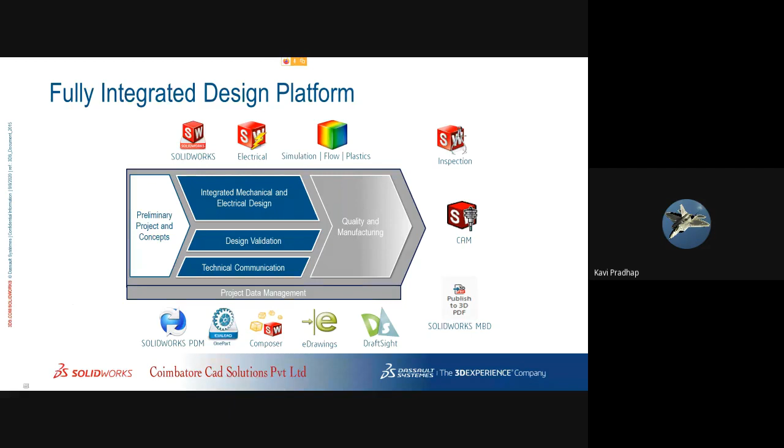So the different modeling techniques - as I said, 3D modeling is very basic and essential to print the 3D product. How do we create that? Mainly there are two ways: feature-based parametric modeling as well as reverse engineering. Feature-based parametric modeling is when we have a concept, we can create that concept into a product or a part. That is the normal way.

We will create a sketch, convert that sketch into a 3D part, add material where it is required, and remove material where needed. Likewise, we will be creating from the scratch one by one. So that is actually the feature-based parametric modeling technique.

Then we have reverse engineering. Most of you might have heard about it. When you have a picture, you can use vector pictures, like black and white pictures, to trace the outer profile and convert that into a 3D model. And we might also know about 3D scanning. We also have 3D scanners, just like 3D printers, which help us capture the three dimensions of the component.

We are not 2D anymore, we have 3D scanning. So when we have the 3D scanning, when we have the total cloud points, you can import the cloud points into SolidWorks and do some changes. So whenever we have some components, if you want to do modifications, you can again create it using feature-based modeling. That is one option.

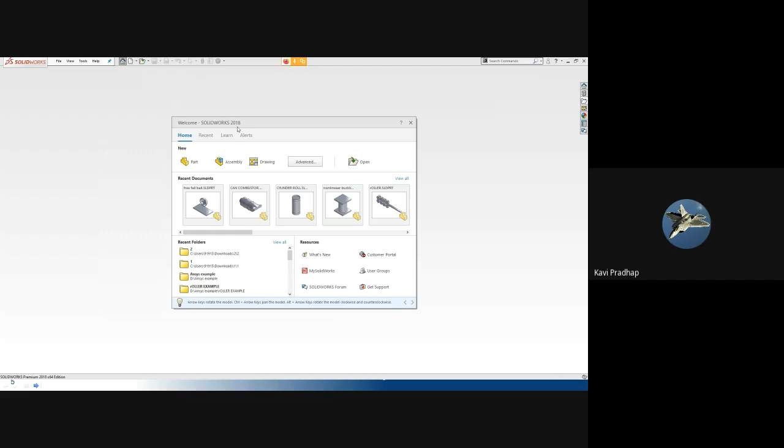Basically, when you open it, this is how it looks like, SolidWorks. This is the basic window. Most of us will get like this when you open SolidWorks, this is how your window will come.

As you can see here, we have three major modules: part design, assembly, and drawing. Part design is where you can create individual parts. When you have individual parts, we need to combine them as a product, and for that you go with assembly. Assembly is like when we want to create something, we purchase all the products and start assembling them. So when you have the individual part created virtually, you can assemble it using assembly, then convert it into a manufacturable drawing.

We all know that when you want to go for manufacturing, we need to provide orthographic and isometric views, and explain the component dimensions and what needs to be done in the drawing. For example, how much roughness it should have, what kind of plating is to happen, what operations need to be done after or before manufacturing, and what tolerances we need to provide. You can provide all these kinds of things in the drawing.

So basically we have three: one is part, the other is assembly where you can assemble it, and the third is drawing, where you can convert that into a manufacturable drawing.

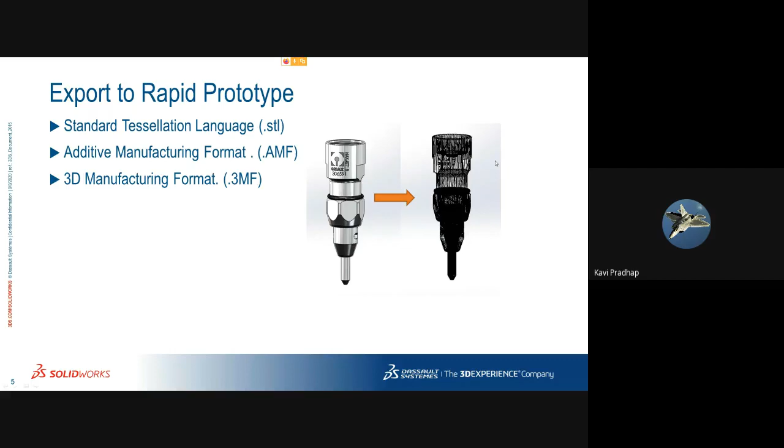Let me adjust some screen resolutions also.

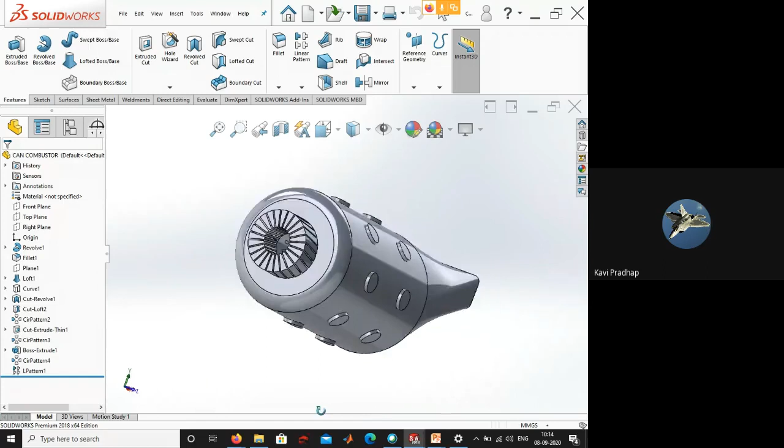So here, basically this is the graphical area where you see the plane area. This is a graphical area where you will create all the 3D models. Okay, let me show you an example. When you have a component, a combustion chamber, whatever it is, the 3D model, the creation and the rotation, everything can be seen in this graphical area.

And this particular toolbar is the heads up toolbar, where you can use the most frequently used options: front view, top view, side view, section views. You can provide front view, top view, side views, etc. It's called heads up toolbar. You can provide colors, you can change screens, those things. Then we have command manager.

All the things that you can do with SolidWorks will be categorized as features, sketches, surface, sheet metal, those kind of individual tabs. The entire thing is called command manager. Each tab in the command manager has a set of features, like sheet metal design, mold tool design, surface design. Those kind of things can be done here.

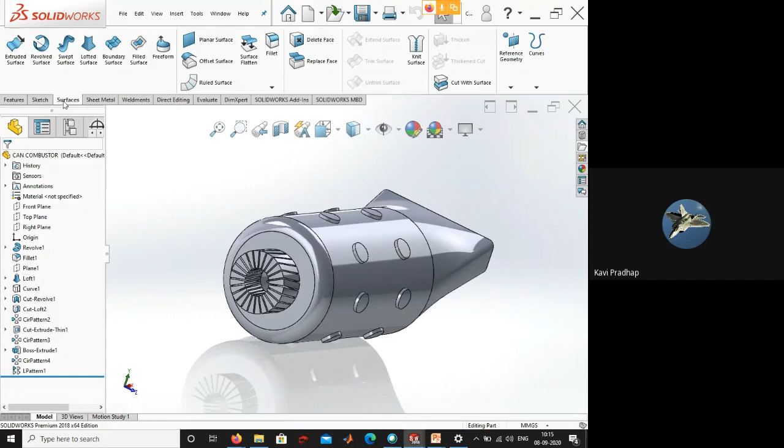So let me show you how you can create these kind of components from a basic sketch. Whenever we want to create a 3D, it has to be started from 2D sketch. When you want to create a rectangular block, we have to start from a rectangular sketch. First, you have to draw the sketch and convert that into a 3D. So we have two environments for that. One is the sketcher environment. In the command manager, you'll be having sketch.

Hope most of you also have a software to work with. If you can't find anything, let me know.

So in the command manager, you can see sketch. Now you will be able to access all the things required to create a sketch. When you want to create a 2D sketch, we need some references. In engineering graphics also, we have a drawing board, and on top of that we place the paper. Without a reference, without a stationary plane, we cannot create any sketches. So just like that, we need planes. These 3 planes represent 3 directions of the component.

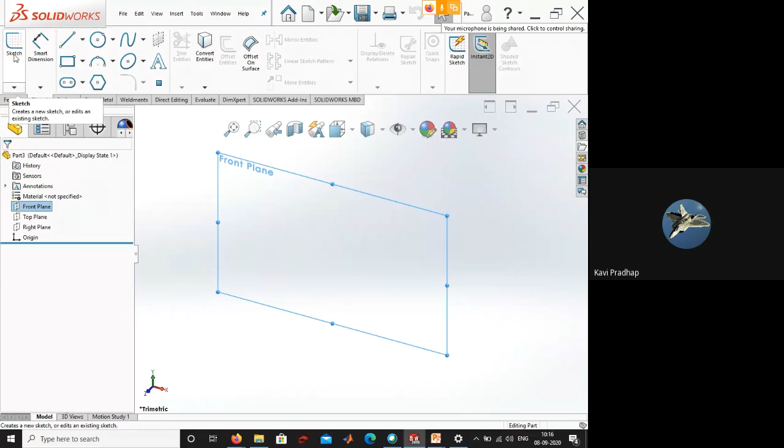Whatever we have in real world, everything is 3D. So these 3 planes represent 3 directions as well as 3 planes. Select the front plane, go for the first option, sketch. When you do that, you'll be entering into 2D environment. What we are having is a part in the 3D environment. If you want to create the part, you have to start from 2D. To enter into 2D, first select the plane, then go to the option sketch.

It is common for all the softwares. Some of you have worked with Creo or CATIA, some with SolidWorks, and some have not seen CAD software. In future, with any other software, the methods and techniques will be the same, but the names of the individual options will vary, nothing else. So select the plane, go to the first option, sketch, and you will enter the 2D environment.

Here you can access all these tools: lines, points, circles. When you want to create a cylinder, just draw the circle. The circle dimensions can be anything. You can enter the value here. Sorry. You can enter the value here. Diameter is 100. Just enter that. You can provide dimension. Providing dimension is very important when you create something.

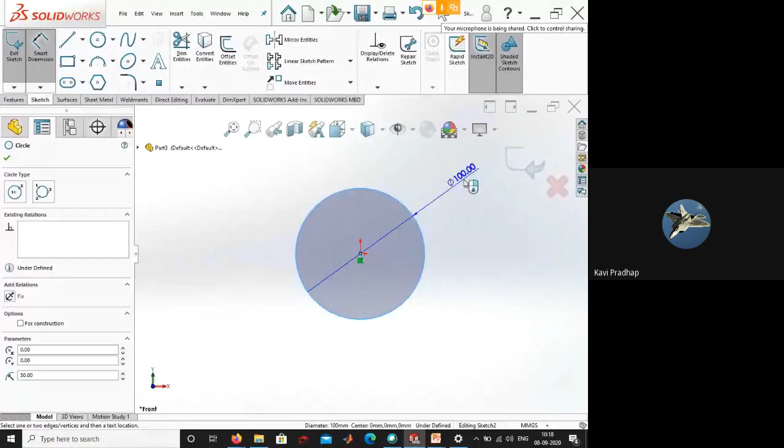Only if you provide the dimension will it stay at 100 mm. Otherwise, it will not be 100. So providing dimension is very important. Even after I create it as 100, if I try to move it, the dimension can be varied just by dragging. That's why we need to provide dimensions. Here you can see smart dimension. Using this single option, you can provide all the dimensions: linear dimension, distance between 2 points, line, radius, diameter, angle.

So select, you can provide 100, the component will be 100. Okay, so from this what we can understand is that it is called parametric. Parametric in the sense you can drive the geometry using dimensions. When you change the dimension of that particular geometry, the dimension of that component will also be changed.

So for example, it is 100 mm. If I try to change it to 200 mm, the size will be doubled. As you can see, the size is doubled to 200. So likewise, when you change the dimension, the sketch shape of the component also gets changed. That's what parametric is.

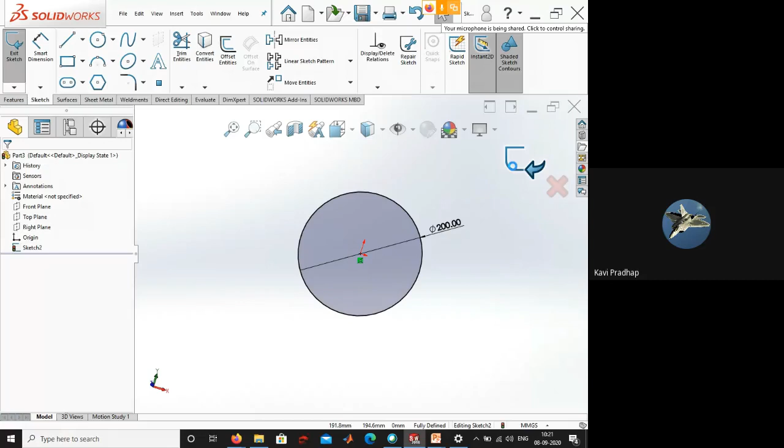So once you've created the sketch, it can be anything. In this case, I have a circle. I'm going to convert this into a cylinder. Once you have created the sketch, you have to come out of the sketch. Just click this and you will be out of the sketch. You can convert this into 3D using these feature options.

So the first things: extrude boss, revolve boss, sweep, loft, boundary boss/base. These options are used to create material. The other options, the cut options, extrude cut, hole wizard, revolve cut, sweep cut, are used to remove material. That is the difference between these two, like positive and negative. So you can create material and you can remove material.

So first let me create the material. If I want to convert this into a cylinder, select the sketch, go for extrude. You can see the length that it is creating. So you can vary the length of the component to whatever dimension you want. So first you create the sketch, and based on that you can vary the length.

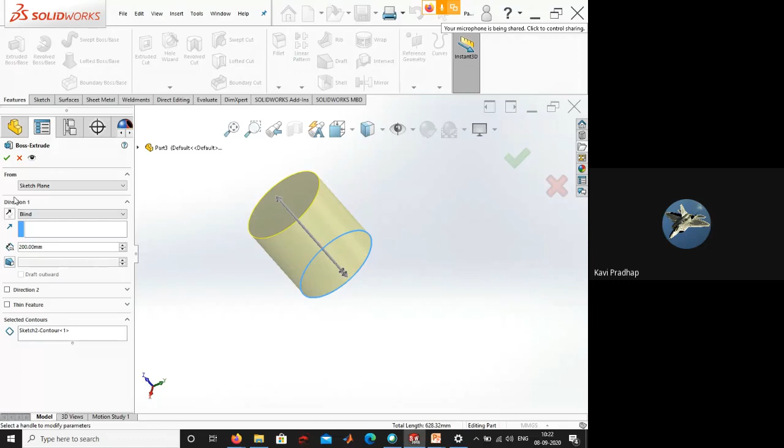So the diameter is 200. The length I need is 200. So it is going to be a cylinder with the diameter and the length as 200. Once you've given the length as well as the dimension, just click OK. So this will be converted into a cylinder. When you want to create something, it can be any component. This is just a cylinder.

So most of you might be thinking it is very basic. Yeah, I will explain one more component also, which will have other features. For those who don't know CAD modeling, this is for them. You can create the 2D sketch and convert it into 3D. Here you can see all 3 views of the component. You can create anything you want, but this is the basic way: first create the sketch, then convert it into a 3D model.

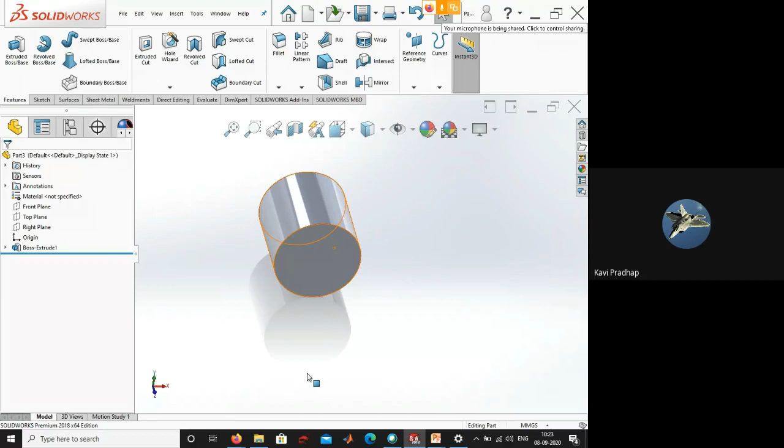There are different ways of converting it into a 3D model. Extrude is one of them. Revolve, we have sweep, loft. Let me give you an example. So if you want to remove something, I want to remove material inside of this. So select the point, provide the value, provide some dimensions to this.

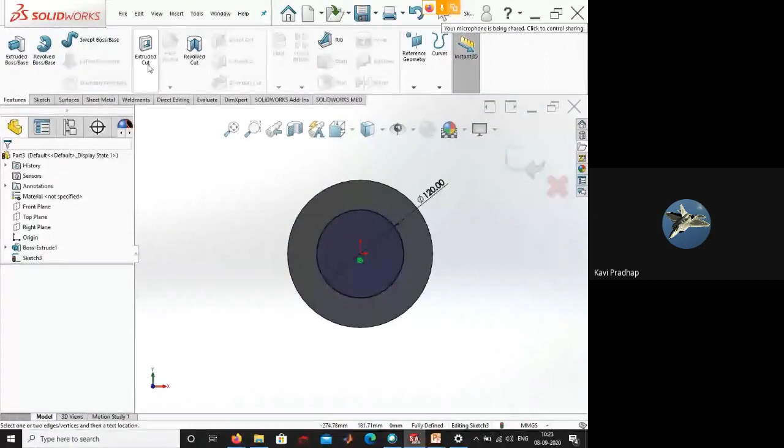So go for extrude cut. Extrude cut is to remove the material. As I said, extrude boss is to add material, extrude cut is to remove material. So you can perform this operation. Just like that, you can remove the material. So you can add material as well as remove material. When you want to create some component, it can be anything. So let me show you one example.

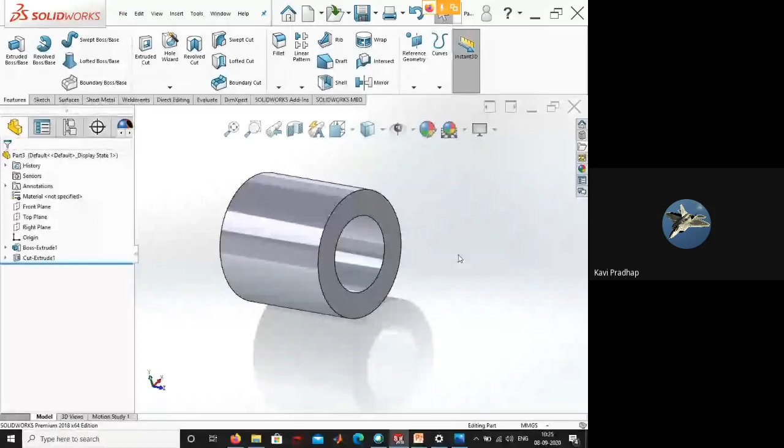So likewise, you have to split them one by one. Once you have split it, you can create it as a model. First, when you see a model, we have to split them as identical components: rectangle, circle, square. Then we can create that using SolidWorks in the same options.

So do not think that it is just a rectangle or a cylinder, because whatever component you are seeing in the real world, everything is made up of basic shapes. So when you know how to create a basic shape, if you combine them together, you can make any kind of shape. So whatever you're seeing here, I'm going to explain using basic shapes only. So let me show you how you can do this.

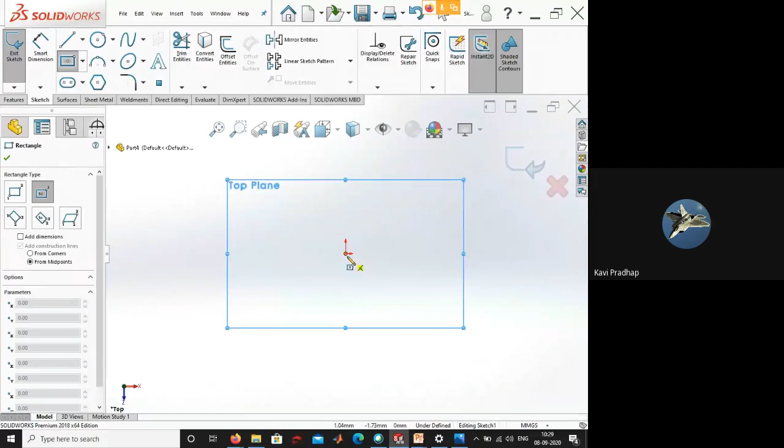See all these shapes: parallelogram, square, rhombus, rectangles. All these are 4-sided polygons, and they can have a different nature. For this, we can take a center point rectangle. A square is also a type of rectangle; the difference is it has the same dimensions. So width and height are both going to be 80.

So how did I give these dimensions? Let me show you once again. When you draw this shape, go for the smart dimension, select this line, provide 80, and select this line, provide 80. If you provide both of them, you can see the color variation in the component. Hope it is visible to everyone. The color will be varied.

Previously it was in blue color, now it is in black color. That is actually a nature of SolidWorks: if a sketch is not constrained, the dimension of the sketch is not fully given, then it will be in blue color. If all the dimensions required for that particular sketch are given, then it will be in black color. That is the basic difference.

Hope you understood this. Once you have given the dimension, you will not be able to change the shape by just dragging. But if it is in blue color, let me draw another thing. So here, if it is in blue color,

Govind sir, you please stop presenting, sir. Govind sir, you please stop presenting. Govind sir, yeah. Hope it is visible to everyone. Yes, sir. It's visible again. Yeah. Thank you, sir. Thank you for your response.

So here you can see blue color lines that can be changed. If I try to drag the same black color point, it cannot be changed. So that is why we are providing dimensions. When we define this line as 80, the line will be 80. It cannot be changed by just dragging. If you don't define it, it can be anything. So that's why defining a sketch is very, very important.

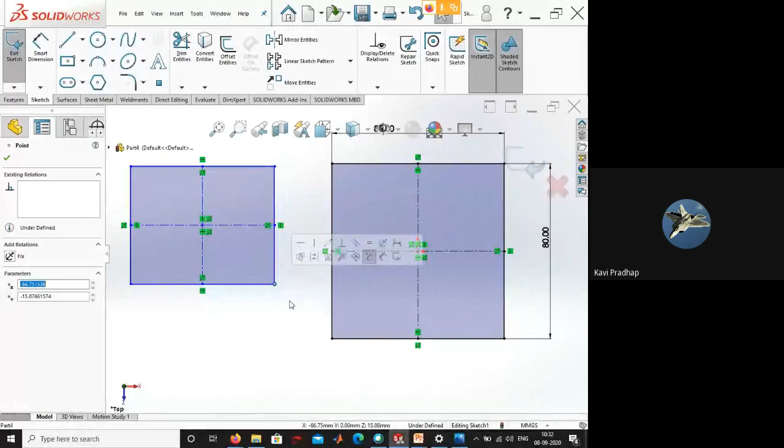Just explaining once again, since it is very important. If it is a blue color line, you can just drag. If it is a black color line, you will not be able to drag it. I'm trying to drag it, but it is not dragging. That's because I have defined the dimension of that sketch. The shape is 80 on the top, 80 on the side.

So now you can create this extrude. You can go for the extrude and provide 12 mm. So this is the top view, as you can see. If I zoom out, you can see the front view. In the front view at the bottom, there is a rectangular shape. That's our rectangle. The height of that rectangle is 12 mm. Wherever my mouse is roaming, you can see it is 12.

Hope this is clear to everyone. I'm just zooming in a little bit to show you the 12 mm. That's why I'm giving the dimension as 12 mm in boss extrude. I have created a 2D sketch and we created a rectangular shape. So the height of this component is going to be 12.

Now it is time to provide filleted edges. When we have sharp edges, it could create some problems. For example, manufacturing a sharp edge will be a little bit difficult compared to curved edges, whether we manufacture it using a conventional lathe or milling machine, or even CNC. After creating less radius edges, we have to file it. So that is one.

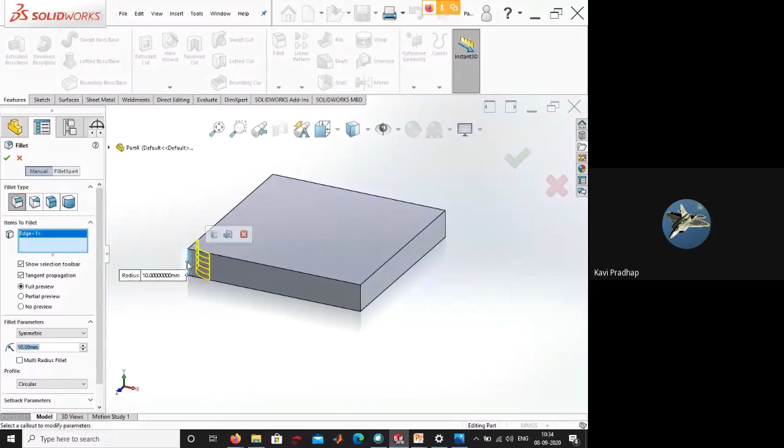So let me select this edge. SolidWorks has an intelligent selection to select all 4 edges automatically. As you can see here, I can go for the fillet option. Select the edge where you want to provide the fillet. Similar kinds of edges can be selected using this intelligent selection. Now the radius is 10 mm, just give okay.

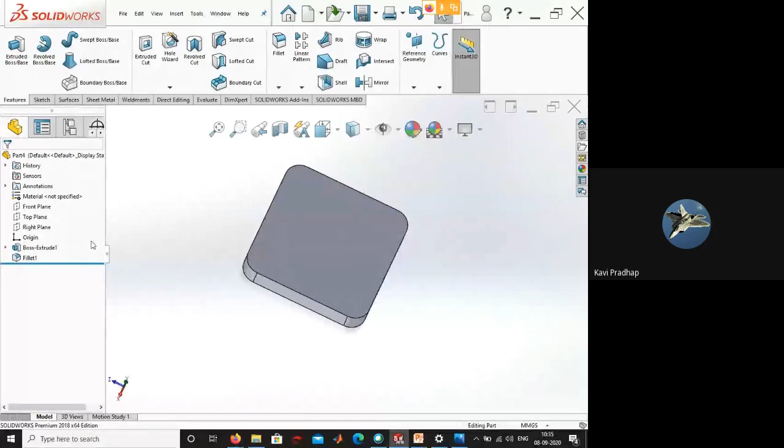So whatever we have seen from the top view, it is very similar to this. Now let me go back to that. Here you can see it is similar to that, except we are having a lot of shapes, holes are there. First we need to create that. So in the top of this rectangular plate, we have to draw a cylindrical shape. The diameter of the cylinder is 50. Here you can see this is the cylinder.

The diameter of the cylinder is 50. I have zoomed in a little bit, so you might be seeing it right now. So this is actually 50.

Kavi Pradhap sir. Yes, sir. Kavi Pradhap sir, sorry for disturbing, sir. Is the screen sharing enabled only now, sir, in your lab? Yes, sir. It is enabled, sir. Okay, sir. We got a command. Okay. Thank you, sir. Carry on. Oh, yeah.

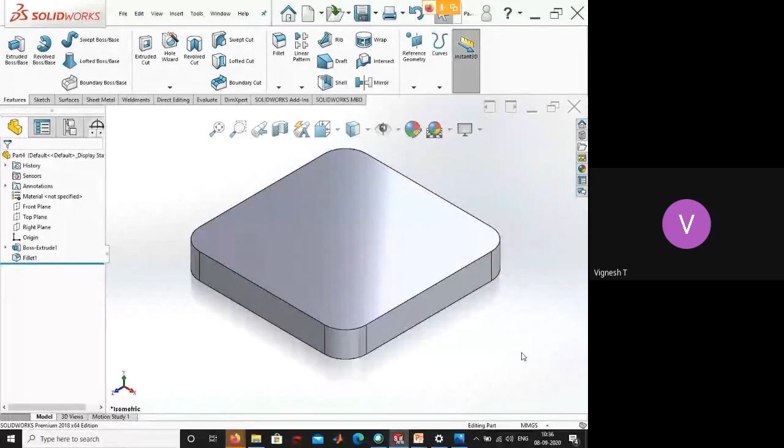So I can select this face, go for the sketch, new sketch. So here you can see whatever sketch we want to draw, either it can be on a plane or it can be on a planar face. But you will not be able to select this particular face because it is a cylindrical surface. We will not be able to select this face as a reference. So if it is a reference face, it has to be planar or a plane.

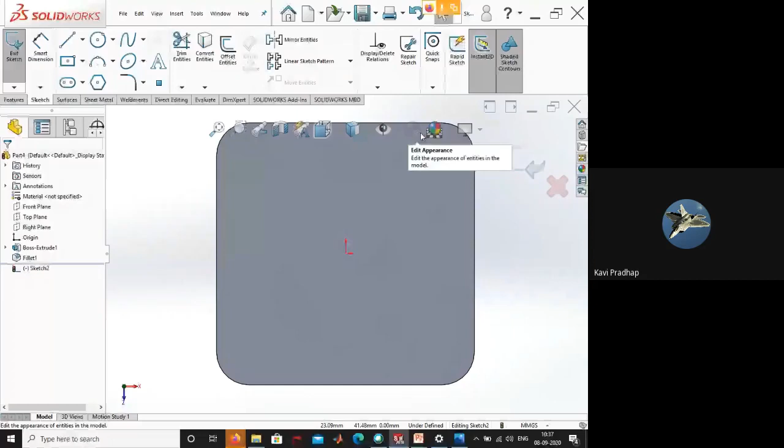So let me go back to its original position, Control 8. There are a lot of shortcuts. I will explain them once I have created the model. From front view, back view, right view, top view, side views, for everything there is a shortcut. I'll explain it. So now let me draw a circle for the cylindrical area, 50.

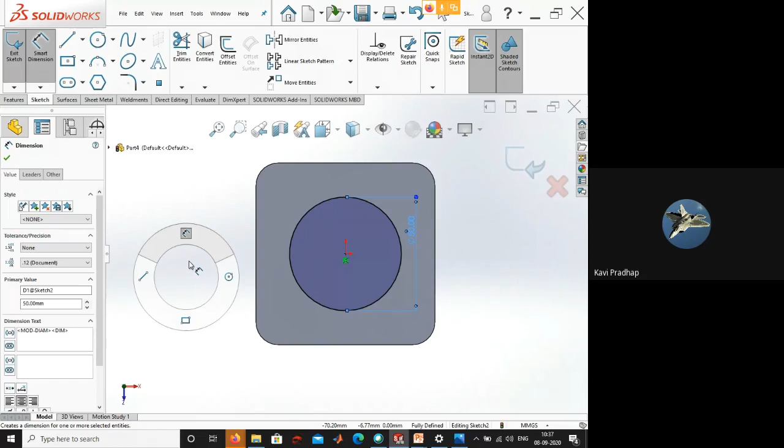So when you right click and move, you'll be able to see this mouse gesture. This is where I'm getting this smart dimension. Without selecting here, if you right click and move, the smart dimension option will be enabled. This is actually one of the shortcuts. It is the quickest way to access smart dimension.

So once you have created the sketch, go for extrude for the length. So here we need to find the total length. The total height is 62. From the top, it will be 50, since the height of the rectangular area is 12. From 62 to 12, you can see the difference is 50. So this will be 50. So just give OK. So now it is extruded.

Now you can remove the material. We have created the material. As you can see from the front view sectional view, there is a hole with a diameter of 26. Here you can see. Let me zoom in a little bit.

Sir, I think a little bit of noise is there. So kindly mute yourself. Thank you, sir. Thank you for your response.

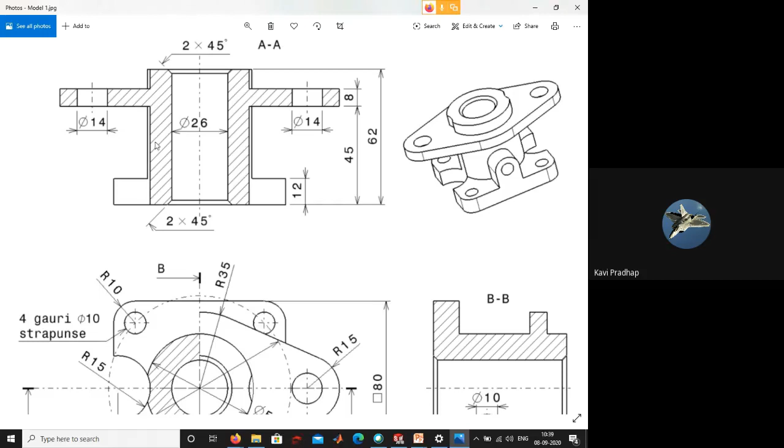So here you can see there is a section view in the front view. Let me zoom in even a bit. Hope you can see this. So here there is a hole at the center. If I see from the top view also, there is a hole. The diameter of that particular hole is 26. So that we are going to create.

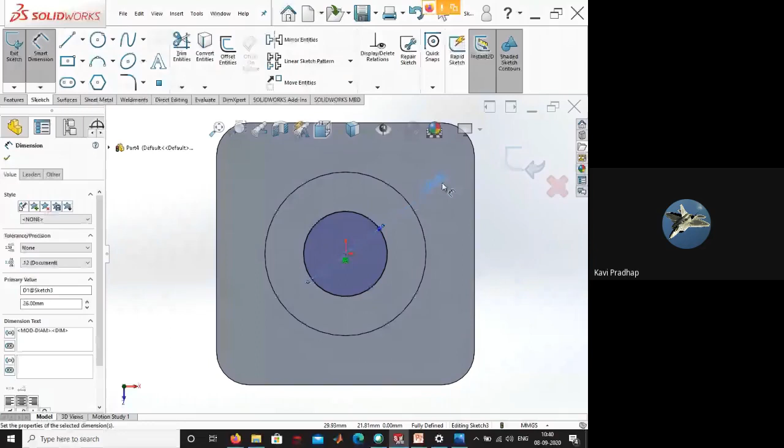Select the top face, go for the sketch option once again. So now we will be able to create the sketch. So select this circle, create it, and provide the dimension for this as 26. So likewise, when you want to create a model, it's like a building block. Wherever material is required, we need to add the material. Where removal of material is needed, you can remove it using the cut options.

Once you have created the circle, come out of it, select the sketch, go for extrude cut. So through all. Throughout the distance, everything has to be removed. So let me provide through all, or you can just drag the arrow. You can click and drag the arrow to control the length. Hope this is visible to everyone. So here you can see, you can just click and drag the arrow to increase the length. The material is removed.

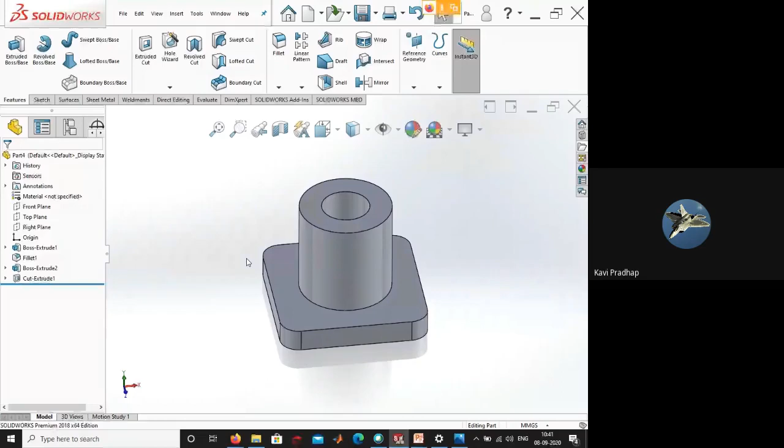So likewise, one by one, we have to create each one of these features, and everything is listed in the feature manager. Let me show you by zooming in. Hope now it is clear to everyone. Here you can see this is the boss extrude and fillet that we have created. Again, an extrude of the cylinder. Then we have removed material. So likewise, whatever feature you do, everything will be listed here. So you can easily identify how you or somebody else has created the model.

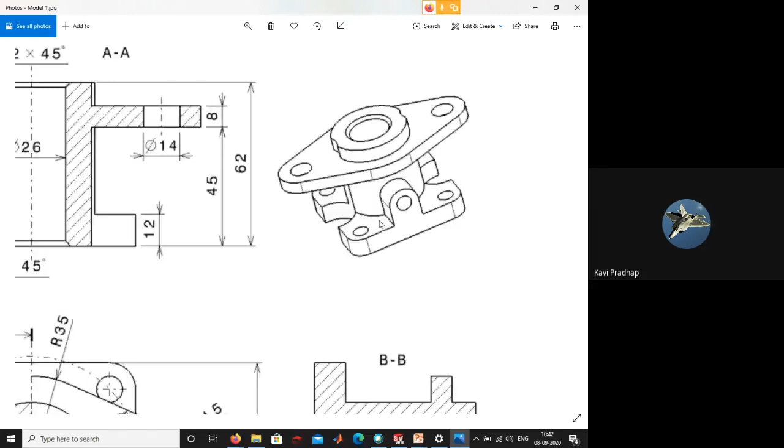So now the other thing, from the sketch, you can see there is a cutout on both sides of the cylinder. So here you can see there is a cutout on both sides. So there is a circular cut. If you see from the top view, you can see the dimension.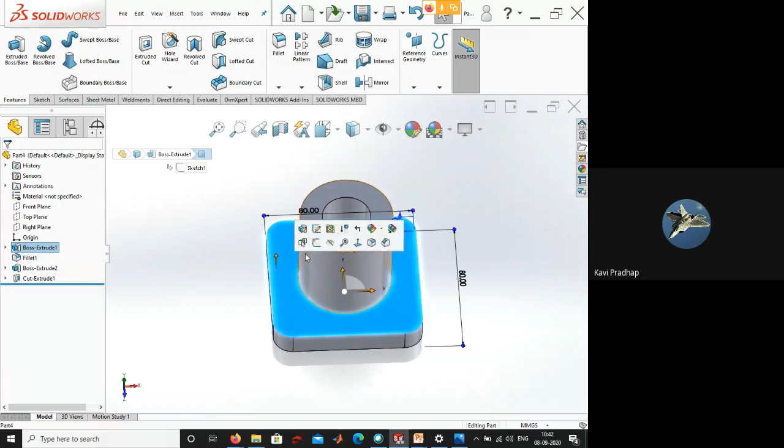You can see from the top view the dimension. The radius is 15 on both sides. So let me select the top face, get into the sketch, and create the dimension for that component sketch. If the radius is 15, you can provide the diameter as 30.

So extrude cut, we are going to remove the material. Extrude cut, just give okay. So when you want to add material, use extrude boss. When you want to remove material, use extrude cut.

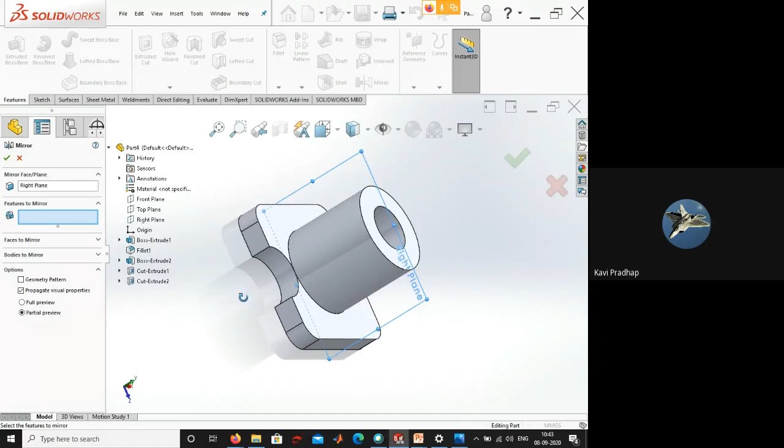Select the plane, the center plane. About the center plane, you can select this cylindrical, and you can see it will be created on the opposite direction.

So if you want to make changes after creating it, you might be wondering, even after creating, can it be editable? Yeah, it is editable. So even after creating this, you will be able to edit it. Let me show you how you can do this.

So here you can see it can be changed to the dimension wherever you want. Let me go back to the dimension. Here you can see it is from the center, it is 38. So if it is 38 from the center, you can provide the dimension as 38.

When you do that, there will be some intersection over the cylinder. You can see the same thing here - there is a cutout here. That is why the cutout is there. So let me come out.

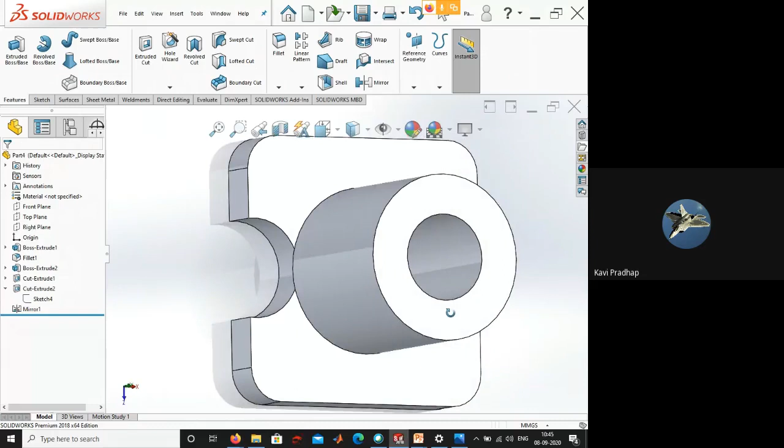So you can modify it in both directions. In both directions, the material will be removed. Hope this is clear. So likewise, even after creating the component, if you want to edit something, it will be easy - you can just go back to the sketch and change the dimension, then come out of it. It will be updated. Yes, I will explain this step once again.

There is a question asking me to explain this. Previously, I didn't define this dimension - I just created it. So now, after defining this dimension, when I come out, you can see it is removing material in only one direction, not the other. In order to remove material in that direction, go for extrude cut.

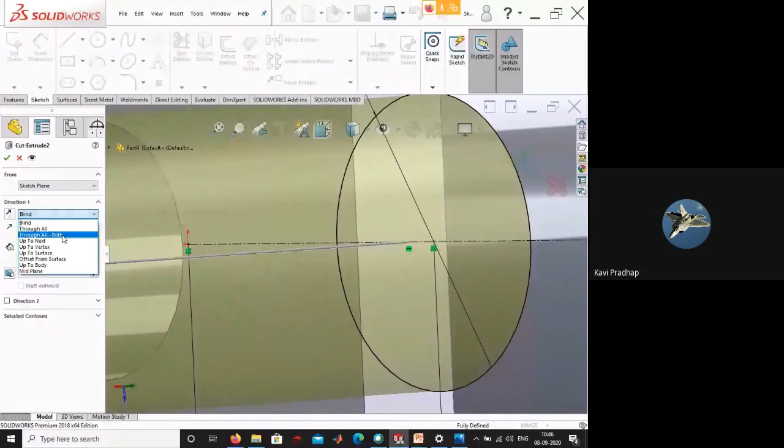Extrude through all on both sides - in both sides, you have to remove the material. You just have to change the option to through all both sides, which means all the material on both sides within the sketch will be removed. So if you do it in this direction, that will happen on the other direction too, since it is mirrored.

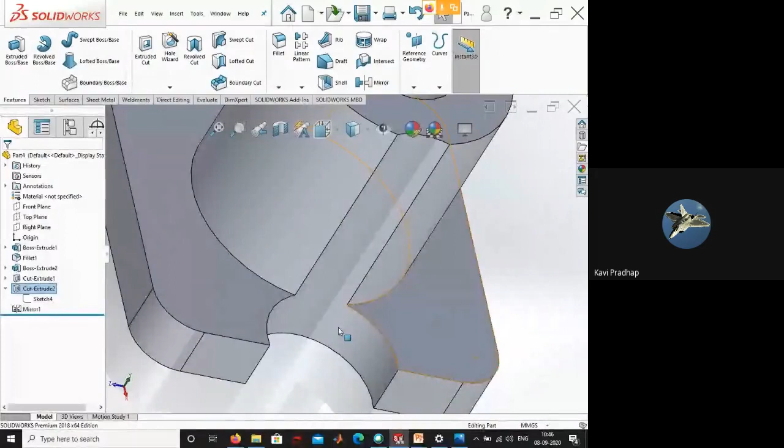So it is very connected. Whatever you do, everything will be associative - other things will also get changed. Hope this is clear.

So now the other things - there are a lot of holes, and there is a diamond shape component needs to be created on the top. Also, you can see at the center hole there is a chamfer, 2 into 45 degrees - it is actually a dimension of chamfer. As I said before, if you want to convert a sharp edge, you can convert it into fillet as well as chamfer. So the dimension 2 cross 45 is actually for chamfer.

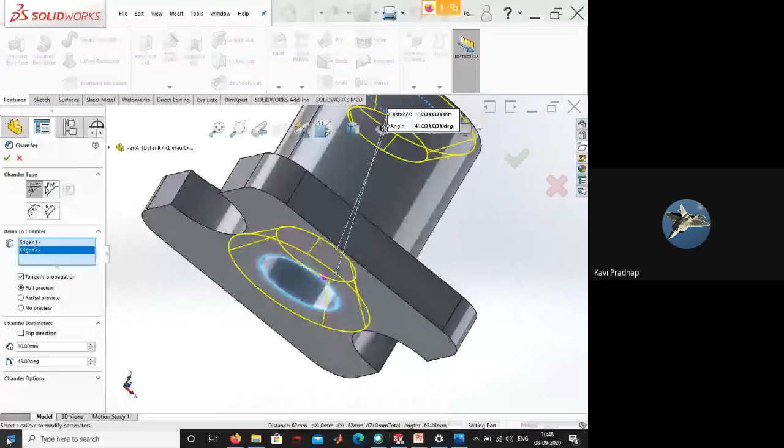So if you want to perform this chamfer, just below the fillet you have an option called chamfer - a drop down. Select it, go for the chamfer, select this edge, select the bottom edge, and you can provide the dimension on the left hand side, along with the angle. Let me zoom in a bit so it should be visible now.

So you will be able to change this 10 mm into 2 mm, and 2 cross 45, as it was defined in the dimension. Okay, so just go upward.

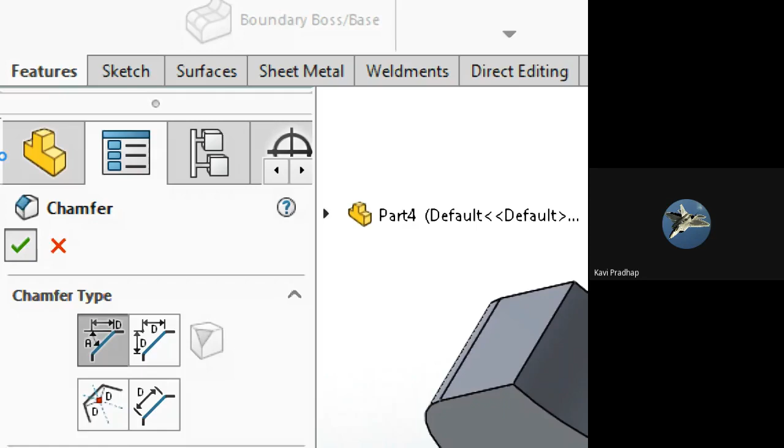You can provide this green tick. Whenever you do an operation in SolidWorks, you have to press this green tick. When you press the green tick, it will take it as okay and complete the operation. Let me zoom out to show - now you can see the edges are chamfered.

Okay, there is a section view here. This option is called section view. So if I select this option, the component will be sectioned. Component will be split into two half. You can see how the component will be in the inner side.

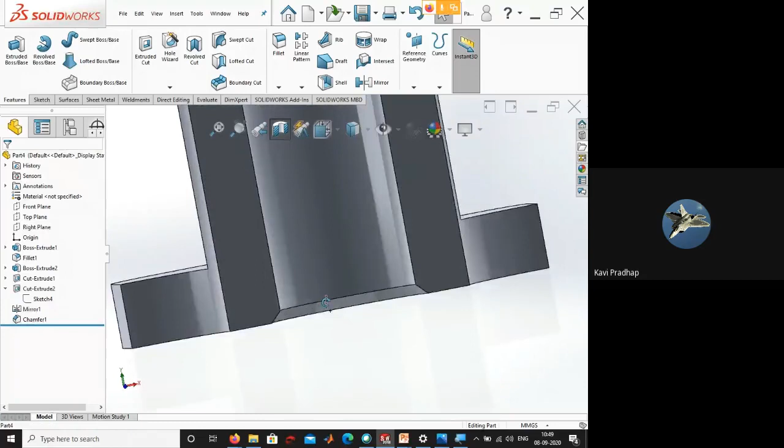As it was defined in the front view, there is chamfer on both directions. So when you create something, you can compare it with the drawing. Hope this is helpful. So let me go back to the component here.

The last thing what we want is that we have to create this shape. We have to create this particular shape, this diamond like shape needs to be created.

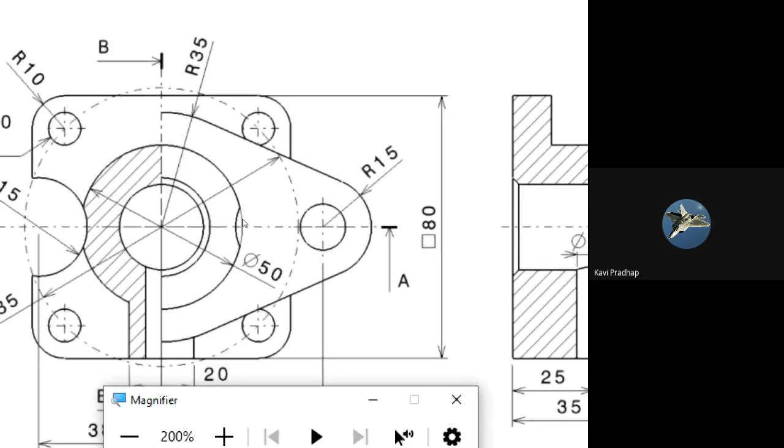So in order to do that, if I see from the front view, I can see the dimensions of that component. Here you can see. So these are the dimensions. You can create a circle with a radius of 35 - you can see R35 radius here. Also 50 mm away from the center, there is a center point having two circles, one with diameter 14, the other with radius 15, which means the diameter will be 30.

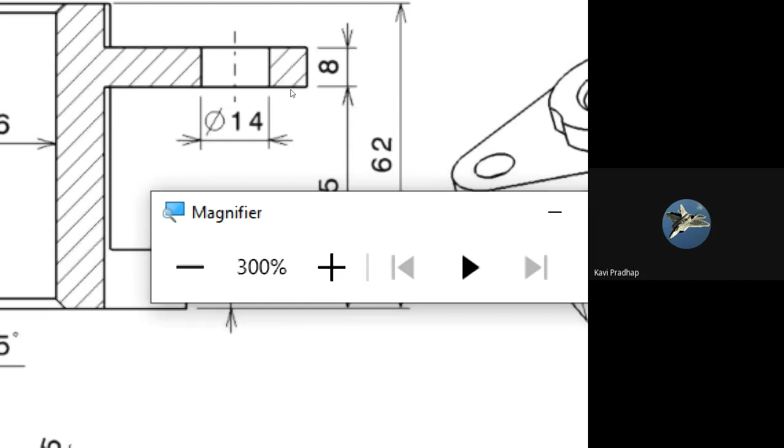This 14 is not defined in this view. 14 is defined on the front view. Here you can see. So when you have different views of a component - we studied this in engineering graphics - when you have different views of the same component, front view, top view, side view, we need to correlate those dimensions. If you cannot find some dimension in the top view, you have to correlate the same particular area on the front view and you will find the dimension. If it is not on the top and front, it will be on the side view. So you have to correlate all these things, understand the model, and identify simple shapes. Then you will be able to create any complex shapes.

So hope this is clear. Now I'm going to do the same thing. First, I'm going to create a sketch on the top face. Select the top face, go to the sketch.

Let me draw center lines just for reference, vertical and horizontal lines. You can see the color texture of this line - this is not actually a normal line. Hope it is visible to everyone clearly. You can see the texture of the line - it is small dash and long dash.

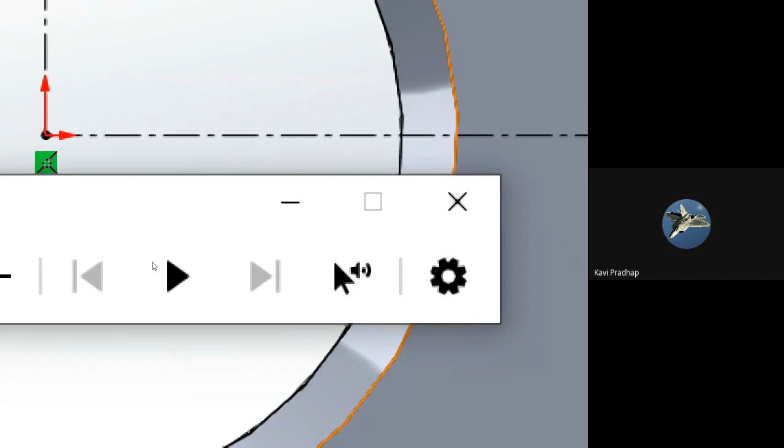We have studied different types of lines - dot lines, dash lines, as well as straight standard lines. This small dash and long dash line is actually called a center line. In SolidWorks we have only two types: center line as well as standard continuous line. We don't have other types of lines in SolidWorks - those things are not needed mostly, so this is more than enough.

So let's go back - let me create a circle with a radius. Let me provide the radius of this circle. Here you can see - let me show you the dimension. The radius is 35, so the diameter will be 70. Provide it as 70.

Now from the center point, 50 mm away, we have another circle. Draw another circle with the dimension 30 - radius is 15, so diameter will be 30. The distance from the center to the center point of that circle is going to be 50.

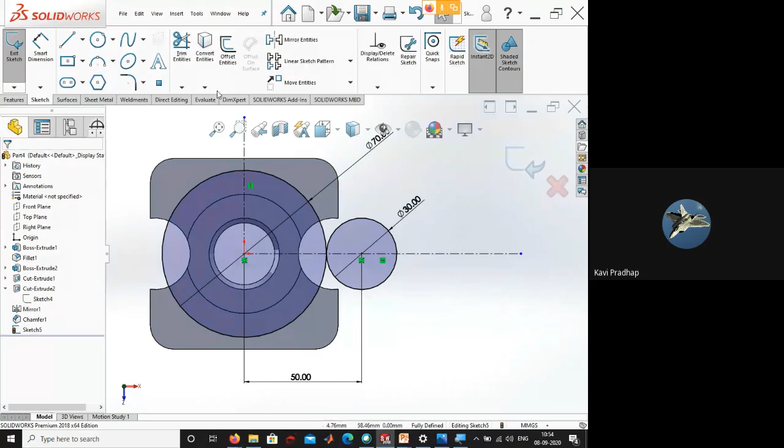Now we'll be able to create a line between these two. Just draw a tangent line, or just draw a line and make it tangent. You can provide relations, just like we would do in geometry - relations like providing parallelism or perpendicularity between two components. Press Control, select these two things, and provide tangent. Okay, just like that.

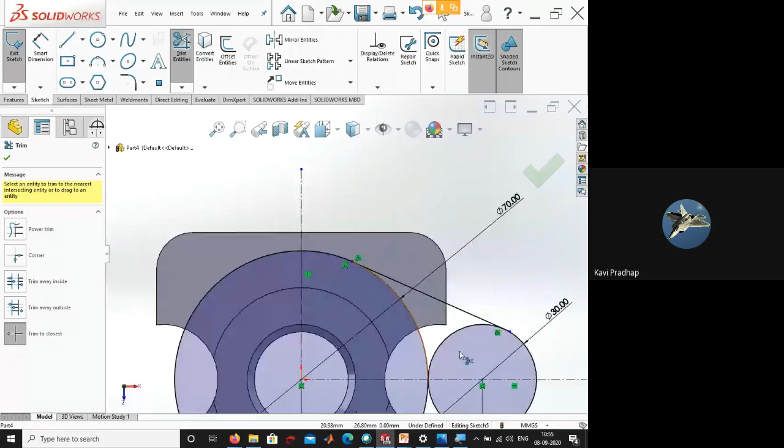So likewise, you can provide different relations also. Once you have given, you can see there is extra portion, so you can go for the trim. Go for the last trim - there are 5 different types of trims. Just select the portion that will be trimmed, so unwanted portions can be trimmed. Just zoom in, remove the unwanted portion. That's it.

Once you removed it, you can see everything is in black color. We need the same kind of line on 4 edges. To do that, you can just do a mirror. Go for the mirror entities.

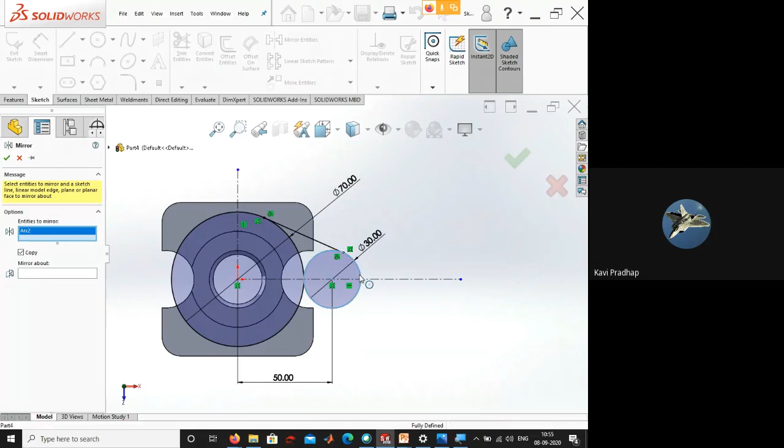You can select the circle as well as the line. In the mirror entities, there are 2 boxes: one, the selections for the things that you need to be mirrored, and another box to select the reference about which you are going to do the mirror. So select this mirror about, and for the second box, select this vertical line. You can see there is a yellow color preview. So just give OK, and it will be on the other direction.

So you can create the sketch and convert that into a mirror. Just like that, you can also do another mirror horizontally. First select these 2 lines on the boxes, then in the mirror about, let me zoom in to show you.

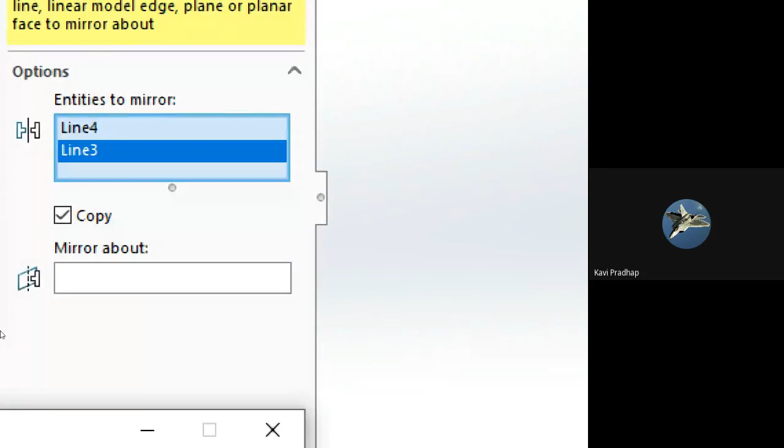There are 2 kinds of boxes here: entities to mirror, and mirror about. Mirror about is a box where you have to select the reference. The reference is nothing but the center line. Select this center line, the horizontal center line. You can see the preview - yellow color preview is there. So go to OK, and it will be created.

So now we just need only the outer portion. There are a lot of unwanted things here. Let me trim it. Go for trim, zoom in, trim the unwanted portions.

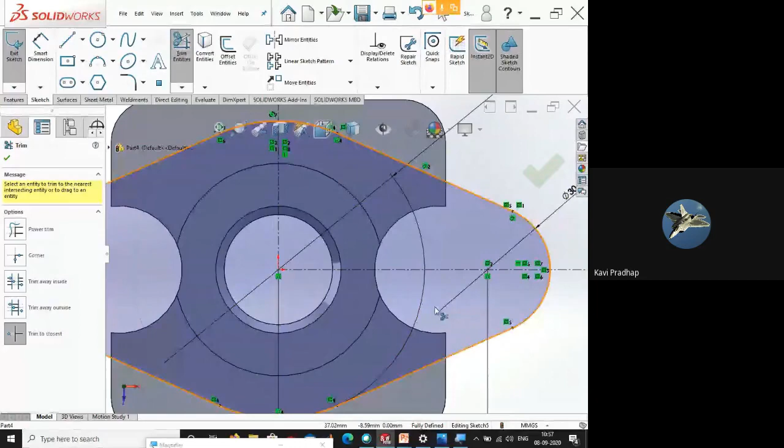Whenever I trim it, you can see the color of the component is getting changed. That's because it is getting closed. When you have a closed geometry, this is how it looks - it will be shaded. You can see the difference. That is because of this particular option, shaded sketch contours. So if it is shaded, it is a closed sketch, nothing else. You can see it is perfectly closed.

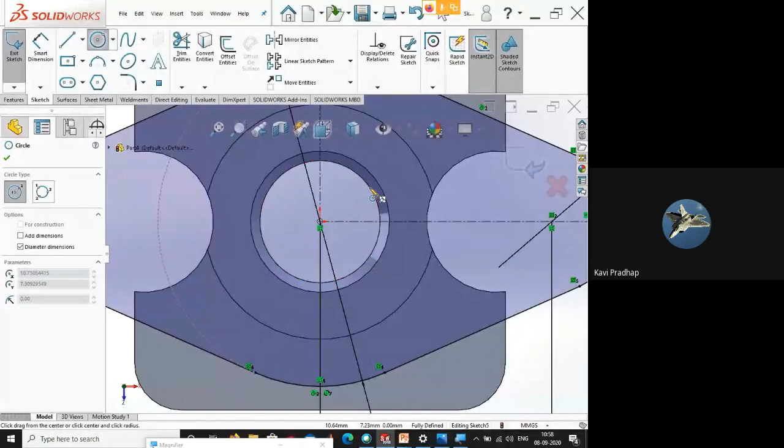So we need to draw another circle in order to create a hollow diamond shape at the center. We need to create another circle with a diameter of 26. Go for the circle from the center point. I have to draw it for 26 diameter. Provide the circle 26 - if it is not given, the entire hole will be filled actually.

Okay, the hole will be filled. So I'm just creating a circle. Let me come out. You can see the sketch is on the top. Right now I'm out of the sketch, and as you can see, the sketch is on the top.

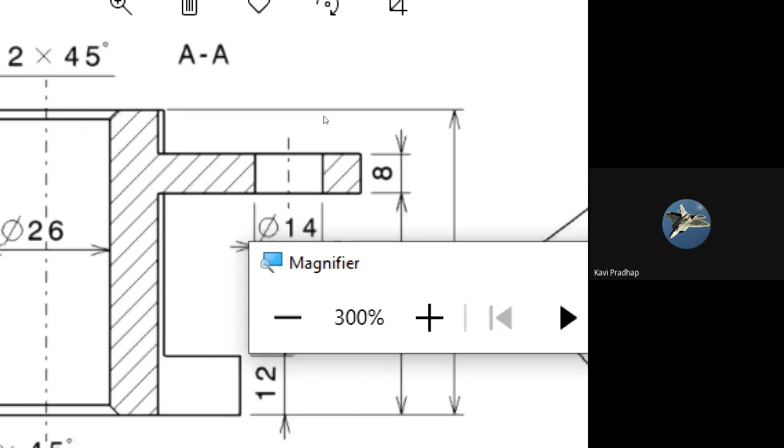But when I see from the front view, the sketch is not actually on the top - it is some distance away from the top. Here you can see it is not actually on the top. It is actually some distance away from the sketch. So we can calculate the dimension. Actually, we need to find the difference between these two.

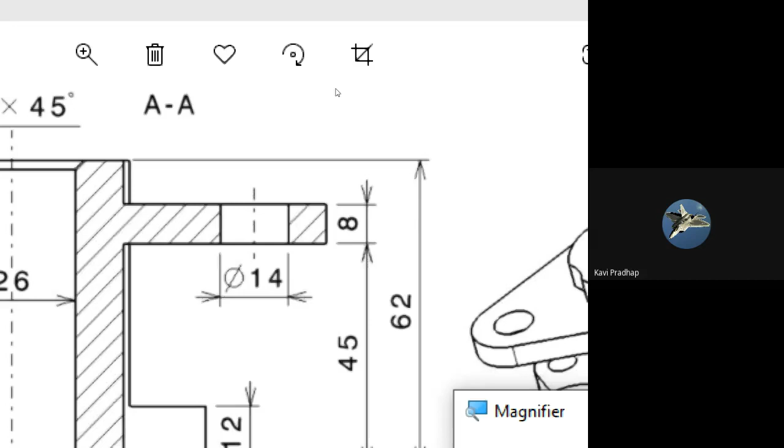62 to 45, so you'll get a 17 distance. In the 17, the bottom portion will be there. From there, it will be 8 mm. So by just calculating this dimension, just select this sketch, go for extrude.

The length of that extrude is 8 mm, not 83, 8 mm. Let me provide 8. We change the dimension, you can see the dimension is changed.

8 mm. And there is another option on the top called from. Change this to offset. You can enter the value of 17 mm. So we have calculated the difference as 17. And also here you can see when I do the offset, it is traveled 17 mm away from the face where I created the sketch.

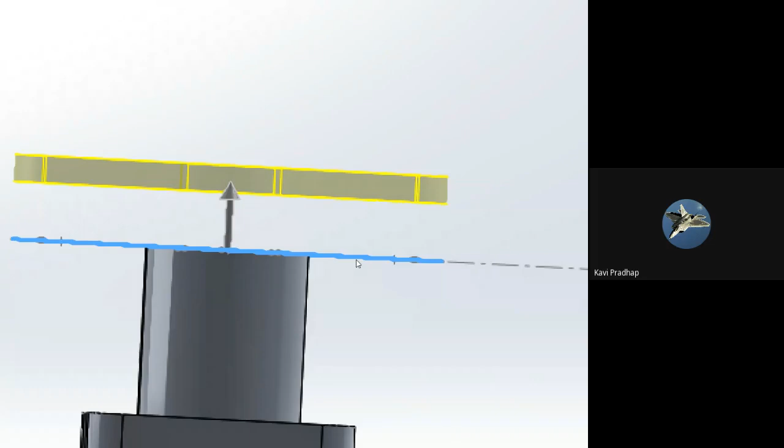So likewise, either you can create material from wherever you created the sketch, or else you can move it from one place to another place using the dimension, as well as you can change the direction, reverse the direction in the opposite direction. You can use this double side arrow to reverse. Here you can see the difference - previously it was on the top, now it is on the bottom. So likewise, you can use these options to control it.

This particular option will be very, very tricky. I hope you understood this.

I hope it is clear to everyone. If it is not, kindly let me know. Because we are actually moving the component wherever we created, we are moving it from one place to another place, and also we are changing the direction. Okay.

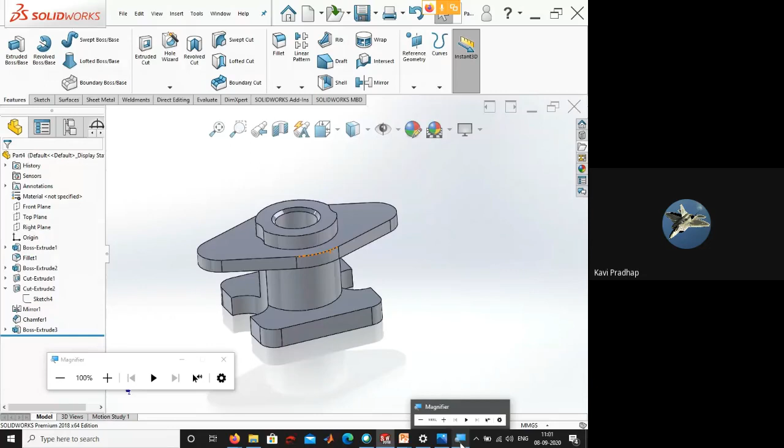So now we need to create 2 more holes on the top. So select this. Here you can see there are 2 more holes for radius. Sorry, diameter 14. It will be given here. For the diameter 14, we have to extrude cut. Select the top face, go to the sketch, and create a circle.

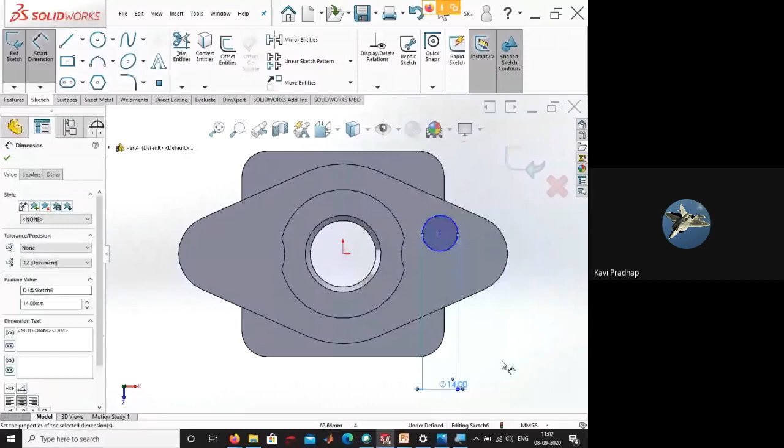You can make them concentric. Either while you're creating, you can create it as concentric circles, or else you can just draw the circle, then you can make it concentric, just like we did the tangency. Okay, so you can go for the circle, you can create a circle wherever you want with the diameter 14. Select this circle, select this circle, concentric. Just like the tangency, we can provide concentric.

Let me show you, let me zoom in a bit. Hope this is clear to everyone. So go for concentric so that they both will be in the same center point. Okay. Just give okay. Extrude.

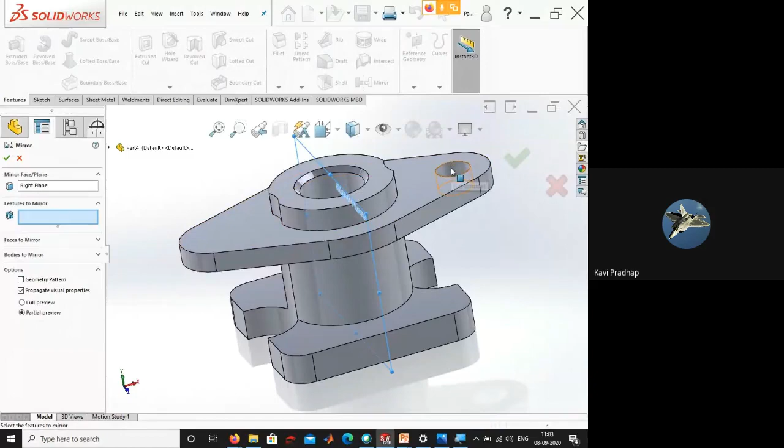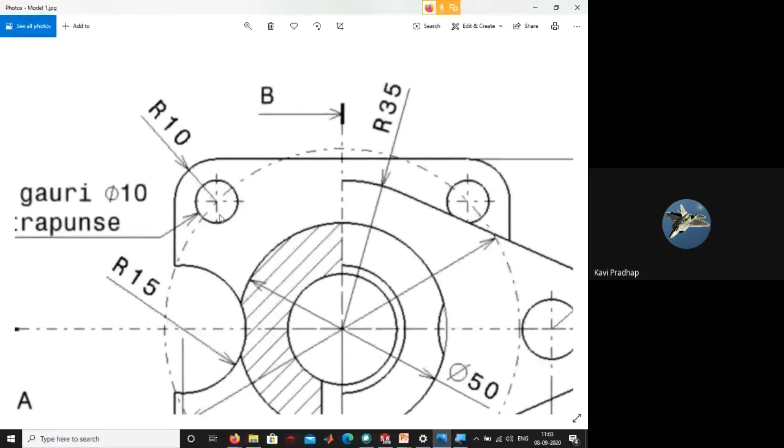So extrude cut, you can use these dimensions to drag it, and also we know how you can mirror it. So you can use the right plane to mirror this particular hollow cylinder cut. You can just mirror the cut. So whatever you do on one side, the other side can also be created the same. Okay, so just like that, in the top view, we have to create a hole. Here you can see diameter 10.

So select the top face, go to the sketch. First, draw a PCD. PCD is nothing but a pitch circle. Here you can see there is a dot and dash line which is connecting all 4 circles' center points. This particular circle is called PCD. The diameter of that circle is actually 85. So first, I have to draw a circle with the diameter 85.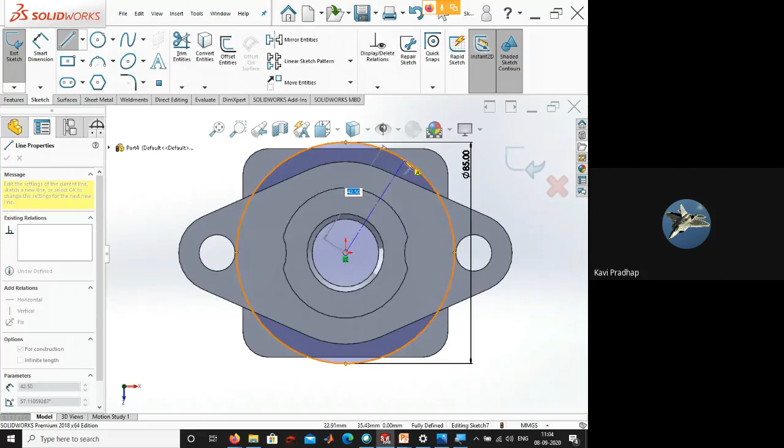So let me draw it. So provide the dimension 85. Now the intersection between this line and this cross section has to be properly at the diagonal, right? If it is a diagonal, it has to intersect at the corner. So select both of them, create an intersection. So let me connect this. Let me draw a line from the center point to this, a diagonal line.

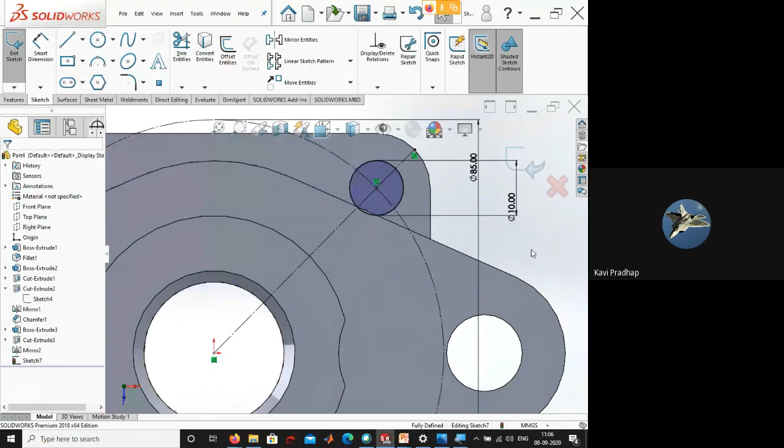So the intersection of these two can be a place where you can create a circle. It is not actually concentric, so it has to be at the intersection between those two. So create a circle with a diameter of 10. Then you can convert these two lines and the circles, which are used for construction, into dash lines: small dash and long dash lines, center lines. So here you can see these are converted into small dash and long dash lines.

Now you can use the same profile to do extrude cut. Remove the material in that particular area. So when you want to create a number of duplicates around the cylindrical area, you can create them using circular pattern. For the circular pattern, you select the feature you want to create in a circle, then the cylindrical surface where you want to create it. You can see the total number of instances is given as 12.

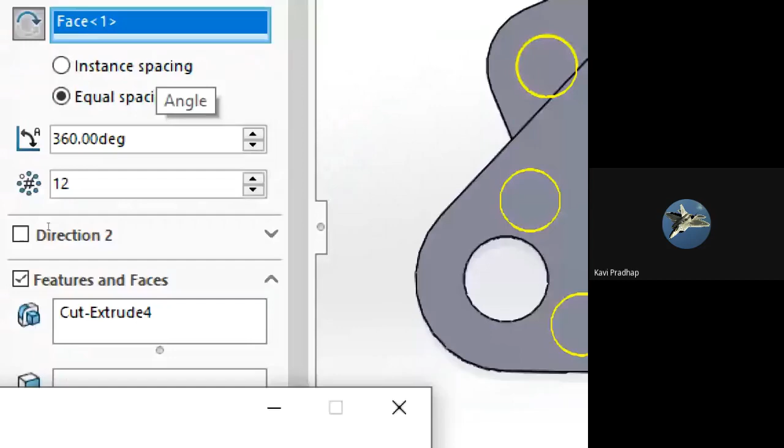Let me change the instance. Let me zoom in a bit to show you. So the total direction is 30 degree. The number is actually 4. Provide 4. Give okay. So let me zoom out. So here you can see the entire component is finished. When I keep it in isometric view, it looks the same as the isometric view we have here.

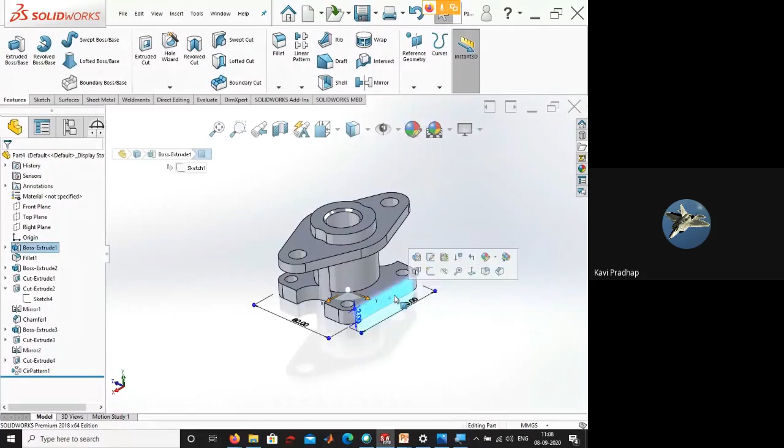The only thing that is left out is the projection here. There is a projection from the center, from the side view. So let me create that projection. From this face, go to the sketch. We have to draw that projection. So let me draw a center line to get a center. So let me delete this. So you can use the same line to convert it, use mirror to mirror it. Connect it using circle.

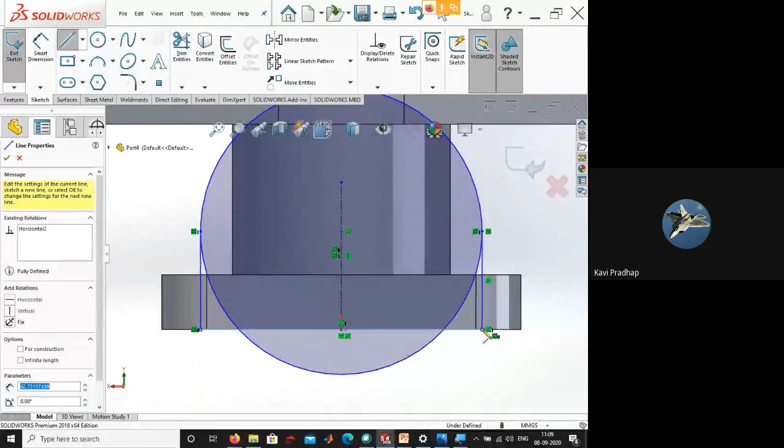You can provide tangencies. Provide tangency between these two things. This will be properly tangented and connected from the base. Now you can provide the dimension and you can convert this as a proper sketch.

So trim the unwanted things. You don't want this. You can provide the radius, the protrusion on the side thing. The radius of that is... the total height is 35. The radius is 10. So let me provide this dimension. This is to be radius 10. Total height from the top to the bottom is 35.

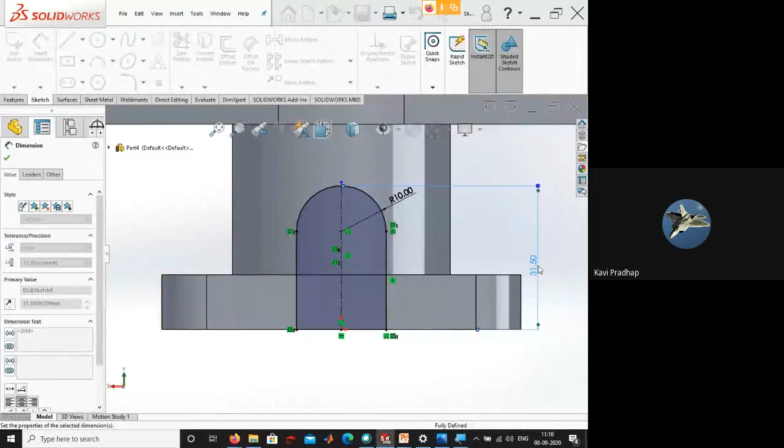So then you can do the extrusion. Go for extrude and up to next, reverse the direction. You can change the directions wherever you want. Then up to next. It will be positioned up to the next. Then you can cut out, remove the material at the center.

So likewise, as you have seen, when you want to create some component, it can be a single feature or it can be a number of features. You cannot define it at the initial stage itself. We have to create all these features one by one in order to completely create the component.

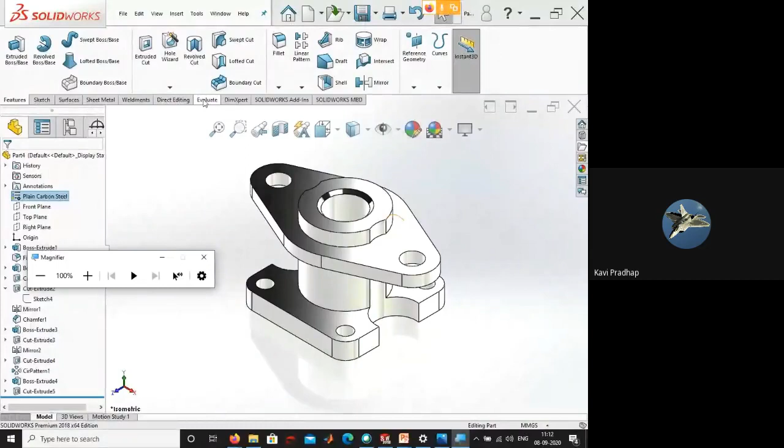Just right click on the material. Let me zoom in a bit. Right click on the material. You can select what material you want. And you can validate the weight. Go for the Evaluate tab. Go for Mass Properties. In the Evaluate tab, there will be Mass Properties. You can identify the mass here. The mass, volume, density, everything will be listed here for that particular component based on the material we have provided.

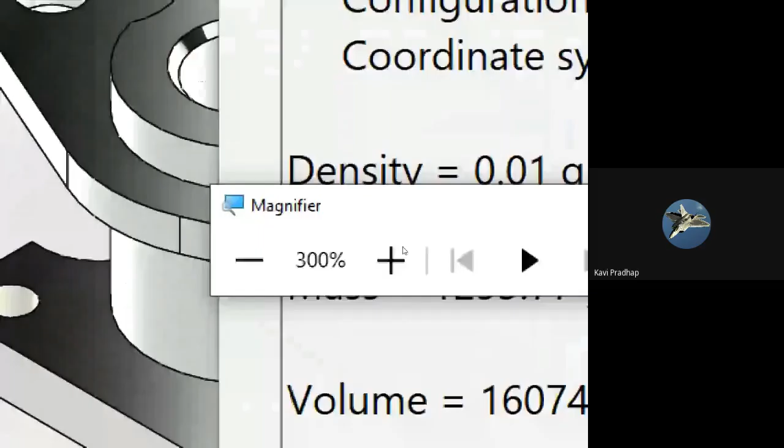Hope this is clear to everyone. Now it is visible as you can see. It is nearly 1 kg, 1253 grams. Okay, so now you can change different materials. I can go for plastics. I can go for ABS, nylons. You can apply all this material property and you can see how much mass it is having. What is the difference in mass?

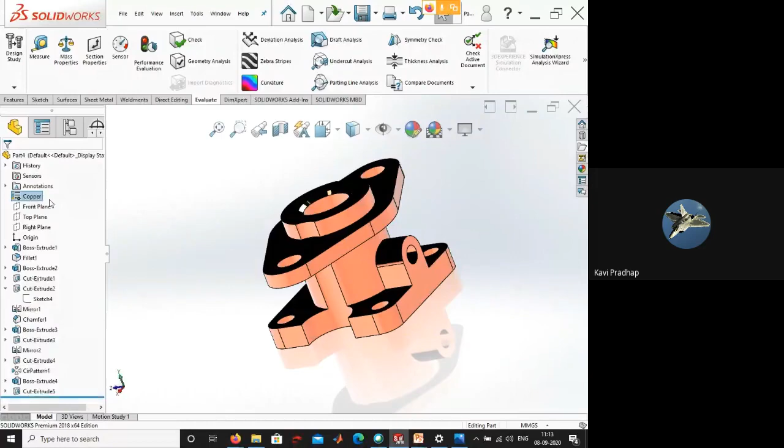When I'm applying different materials, you can see different textures being applied. This is for ABS. When I go for copper, this will be in a different color. This is for copper. So likewise, even when I go for cast iron, you can see the textures, casted texture. Hope it is visible on the screen. You can see the texture clearly. You can see here how the texture of the cast iron is given. So it's not just material. You can see the textures, weight.